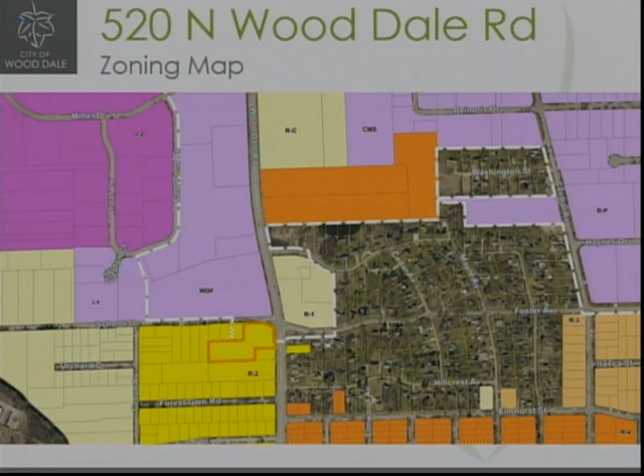The existing conditions: it is a wooded lot. It currently contains a 22,300 square foot single-story library. There are 58 parking stalls that wrap around the building to the south.

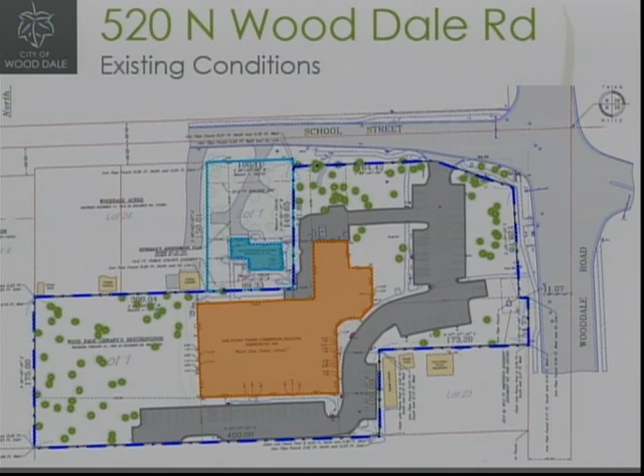There was a previous special use granted to the property in 1979 to operate the library. A variation was granted in 2000 to increase the lot coverage to 45.4%. Then in 2008, there was a special use granted for the adjacent property, shown here in lighter blue, to use the residential structure for the library offices. The request before us tonight is seeking a special use amendment to expand the library, PUD, and also a major site plan review.

The proposal includes—there we go, it's out of order, apologize for that—a 3,800 square foot addition, which is the darker blue. There has been a deviation requested to permit a type 9 building. Since this site essentially acts more commercial in nature because of the parking lot, signage, and lighting, the applicant has requested to build not a single family dwelling unit, but more of a type 9, per the building typologies and zoning regulations. That is one of the reasons for that request.

There's also, as part of this type 9 construction, a setback from adjacent residential properties that is supposed to be 15 feet. They're asking to reduce that to 13.5 feet so they can continue the existing structure and keep the addition in line with it. They're also adding 12 parking stalls along School Street using an existing drive aisle that will be widened. They will add a patio off the addition to allow patrons to enjoy the outside. There will be a sidewalk extended on the south side of that addition to provide pedestrian access to the existing parking lot.

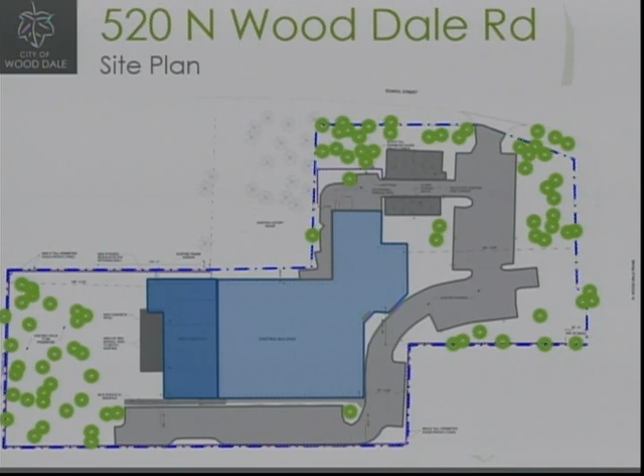In terms of stormwater management and the lighting, I'll start with the lighting. There are a couple triangles shown here in blue, which are general or approximate locations of existing light poles. These light poles have a 360-degree distribution, meaning there's a lot of light trespass going onto the adjacent residential properties. So what the library is proposing is that they'll retain the one fixture noted here in yellow, and they will change out the fixture so that it is directed towards the library property. With the addition of the 8-foot tall fence, they think they can significantly reduce the amount of light trespass going onto those adjacent properties.

With regards to stormwater management, they're proposing a grate to take the water into an underground storage unit. Then they're going to pipe it back up to School Street, add another manhole, and connect to an existing manhole on the existing storm sewer. For the parking lot, this will be graded to catch another dry well, and then that will be piped underground to an existing manhole for the existing storm sewer.

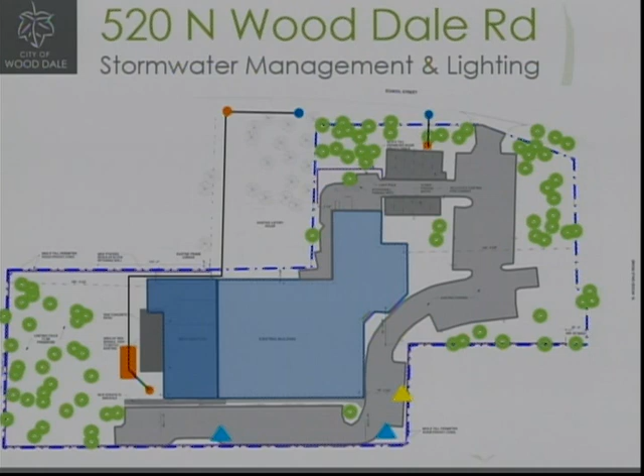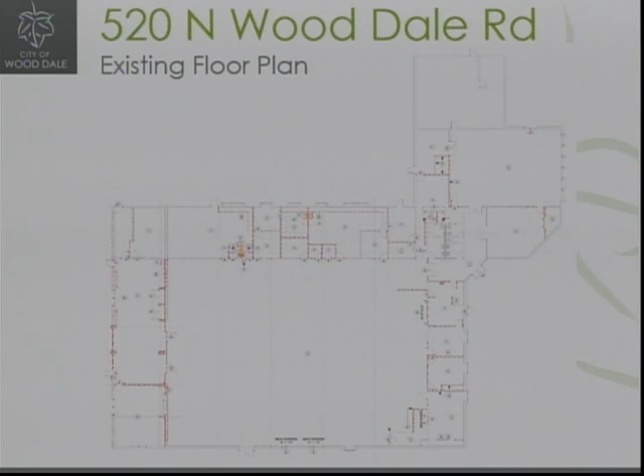The existing floor plan, I realize this is a little difficult to read on the PowerPoint, however almost all of the interior walls are proposed to be demolished. So there's a pretty significant interior renovation being proposed as part of this proposal. Now for the proposed floor plan.

This large blue area here is proposed to be the collection area, and it will have the stacks. There will be a youth services area in green, some activity rooms which will provide flexible meeting and public gathering spaces, as well as perhaps some classroom-style activities. In purple, there are some small group rooms, a computer lab, and the majority of the other space is support services. So there will be a pretty significant renovation as part of the addition. The addition starts somewhere in here, where everything to the left is the addition.

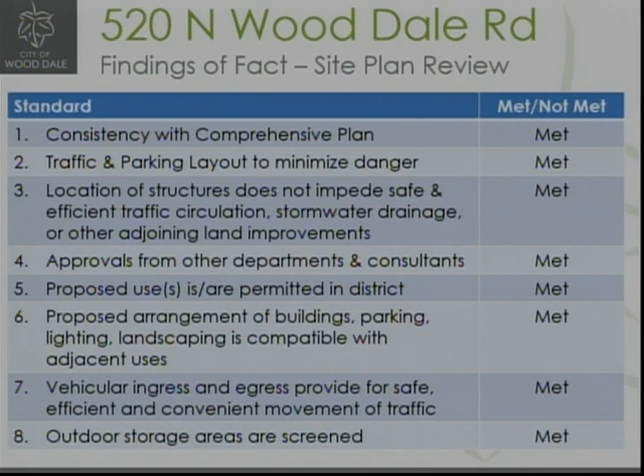And then we have one more request, which is the site plan review. The city engineer did review the proposal and has given approval for the project. The Wooddale Fire Protection District has also reviewed and given approval. The building administrator has also reviewed and given a conceptual approval for the building. Again, reducing light trespass and improving the privacy of the neighboring residents has led to findings of met for all of the standards for the major site plan review.

In closing, staff is recommending approval, finding that it is consistent with the UDO and also consistent with the comprehensive plan. There are 3 conditions that staff has recommended in the memo: substantial conformance with the plans submitted as part of the staff memo, granting the drainage easement for the installation of the BMPs with language to allow the city to maintain if necessary, and recording a note to title for the BMP, which is standard for all best management practices installed. So I'm happy to answer any questions.

Does any member have any questions for staff regarding the report that was made or anything in connection with this project?

Yes. How many trees are we going to lose right on Wooddale Road? Do you have an idea of the amount of trees they're going to be taking out, the shade trees? So if you look at the demolition architectural site plan, Exhibit C-1, there are no trees proposed to be removed along Wooddale Road. The trees proposed to be removed are the ones that will be impacted by the improvements, and you'll see they're annotated in red. Are you looking for a total count? No, I just want to know if we're losing anything on Wooddale Road for the look of the library. Nothing will be removed along Wooddale Road.

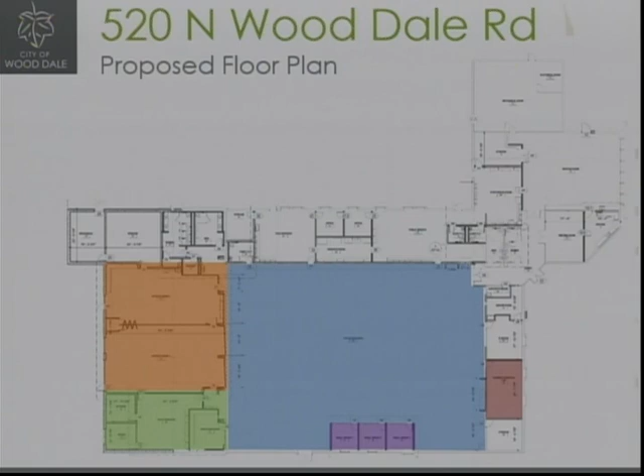Those interior renovations to the staff areas enhance toilet facilities for the patrons, but also make the staff areas more efficient, and also provide an opportunity to take what I'll call the stacks, or the original floor plate where all the books are, and make that a little more flexible, leveraging the existing meeting rooms complemented by the addition to give us more community-based space for programs and activities.

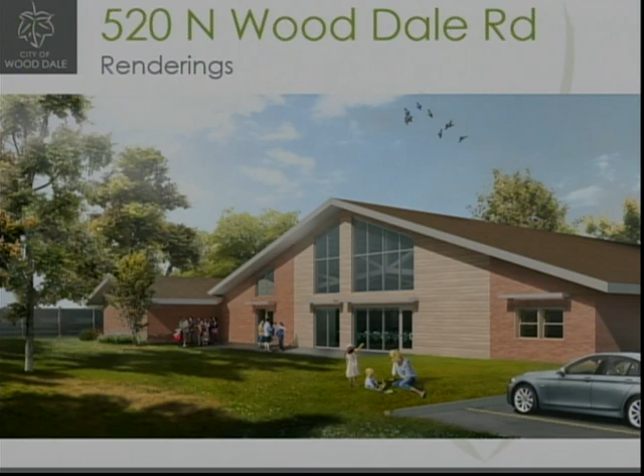The appearance of the library is intended to really match the existing architecture, but also to recognize that contextually it sits within a residential area, and we want to make sure that it is in keeping with what the area is zoned for, while recognizing that it is a commercial structure being utilized for public service.

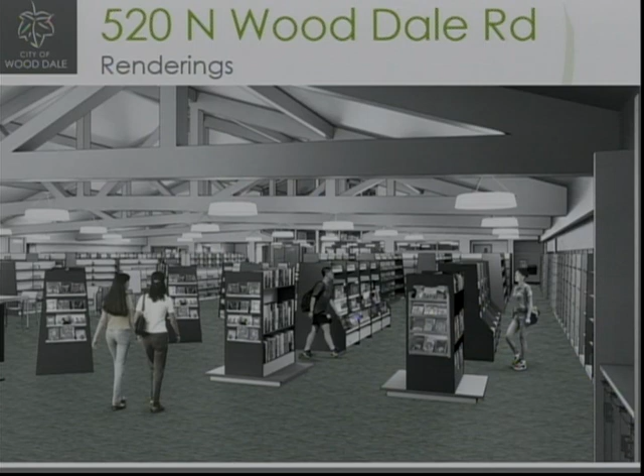The interior, for the most part, will match the existing structure, an open structure on the inside. However, the stacks and those areas will be adjusted and modified accordingly to allow for more patron space, whether it be seating, aisleways, et cetera, and ADA accessibility, those kinds of things.

What we believe is probably the richest portion of the building is really the backside, where the addition is designed to make this flexible. It can be broken into 2 rooms or one large open room, which can be open to the library. As we develop programs such as authors, et cetera, which are usually very popular and you can never predict how many people are going to come, this will give the library the flexibility it needs to make sure that all citizens have the opportunity to enjoy these programs that are being offered.

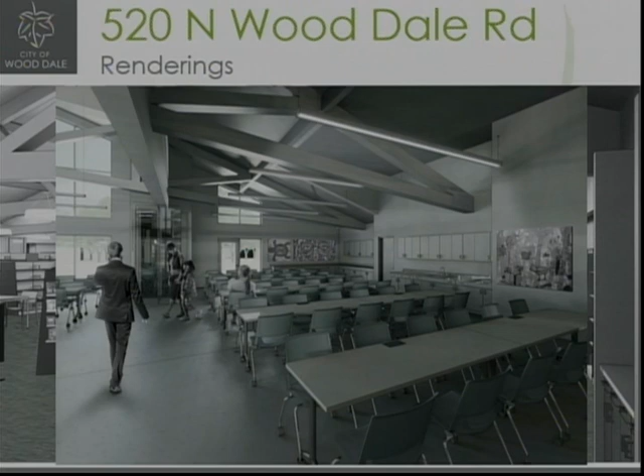And we concur with staff's assessment on the findings of fact, so rather than belabor that any further, that's all I have right now. Thank you very much.

Does anyone on the commission have any questions for this individual? Thank you. Anyone else on behalf of the applicant? Okay, very good. Any questions so far with anyone who's spoken? If not, does anyone have any objection to the plan of the application? Anyone in the audience here today? Did the community development receive any notifications or inquiries relative to the plan? We have not received any inquiries regarding this proposal. Anyone in the public audience who would like to address either in favor of or against, or make any comments relative to this particular plan? Now would be the opportunity to do so, or as they say in church, or forever hold your peace. If not, then I would ask if there's anything further from staff. I have nothing further.

So there would be no additional testimony. I would suggest that a motion would be in order to close the public hearing for... Mr. Vaughn? Yes, I'm sorry.